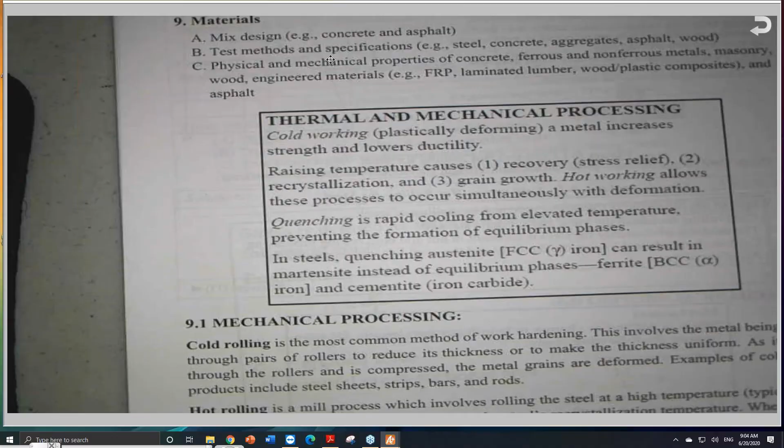Good morning, everybody, this is Dr. Mansour, and today is June 20th, 2020, the AM Civil Breadth AM workshop. We still have one more to go, the one I added to make up for the class I missed, which will be July 4th. So today I have the Civil AM from 9 to 12, and surveying today from 1 to 4. This was also an additional surveying class for those taking the California special exam.

After I finish the course, I added 2 sessions. Tomorrow I have transportation PM from 9 to 12 and seismic from 1 to 5. So this is this weekend. The following weekend, the 27th and 28th, I have transportation construction on Saturday, and Sunday I have construction again, and seismic. Finally, the last free session is going to be July 4th.

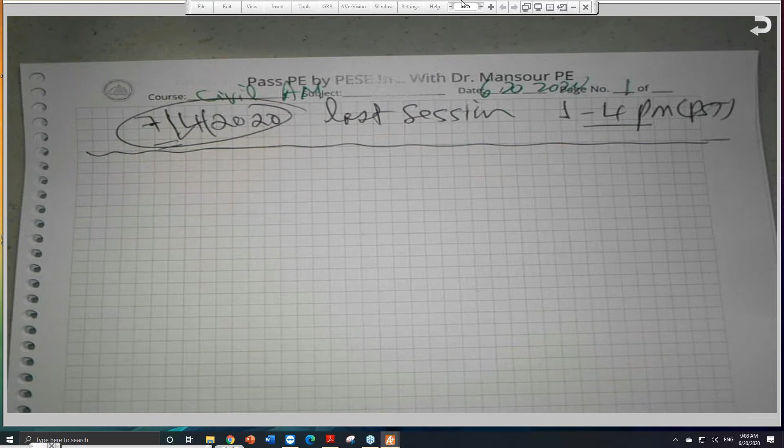I'm extremely busy, but this will not stop me from giving you the solutions for mini exams 1 through 5. There is another chapter, and I don't know if I sent it or if I should ask one of my assistants to send it to you. If not, I can send it during the break. This chapter, by the way, I wrote about a year ago, maybe more or less.

And the chapter has a title of Materials, like Chapter 7 of the Civil Breadth Reference Manual, my textbook for the Civil Breadth Reference Manual AM. Chapter 7 is called Materials, which, according to NCEES, theoretically speaking, you're supposed to get 6 questions related to materials. A parallel chapter, going in almost the same direction, is for the FE, the Fundamentals of Engineering exam, or what used to be called EIT before.

I prepared this chapter and found it really, really useful. I even gave it to the PE group also. So I can say this is FE/PE, because the FE Civil exam covers almost the same material as the PE, even more, by the way. The FE Civil is testing, or covering, more topics than the PE, by the way. If you compare it, you will find this statement is correct.

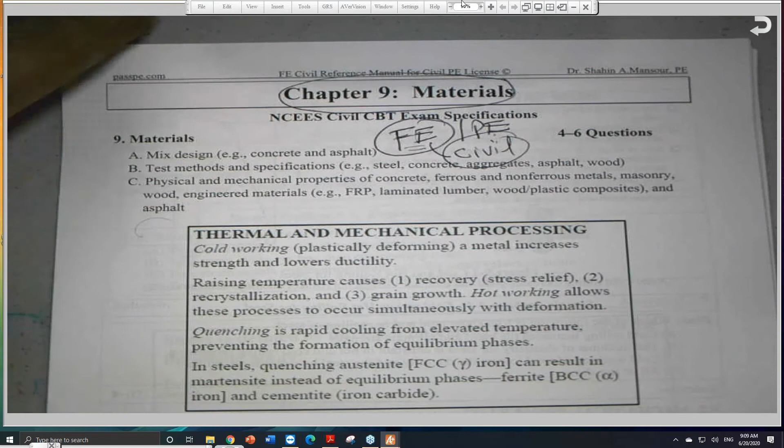So there is some kind of overlap, but I believe the FE has more additional material. When I prepared this chapter, I discussed it with the FE group who attended the class before, and hopefully this book will be out - I don't know when, but I started 2 years ago and I'm still working, I did not finish it yet. They are even going to change the FE on July 1st, 2020, changing the arrangement of topics. Instead of 18 chapters in the old one, right now there are 14 chapters. Anyhow, I will send this chapter to you.

I received one question from one of you, but I don't understand it, even though it's typed from another source. It's asking about the maximum tension for an RCC beam. I will bring the print of this question next time. I know that RCC by itself is roller compacted concrete, another type of concrete used for dams, but the question isn't clear to me, so I haven't responded back to the engineer who sent it, but I will. I don't ignore any questions - if you send one to me, I'll do my best to come back to you as soon as I can. He got this question from somewhere about maximum tension, and it's really not clear to me, so I will look at it and come back to you.

So when we look at materials, which we talked about last time, we need to make sure we understand the properties of these materials. For the PE exam, they expect you to know properties of concrete, steel, asphalt, and wood, and probably I will add masonry to it. We can talk a little bit about masonry - CMUs or bricks, masonry in general, concrete masonry units and bricks.

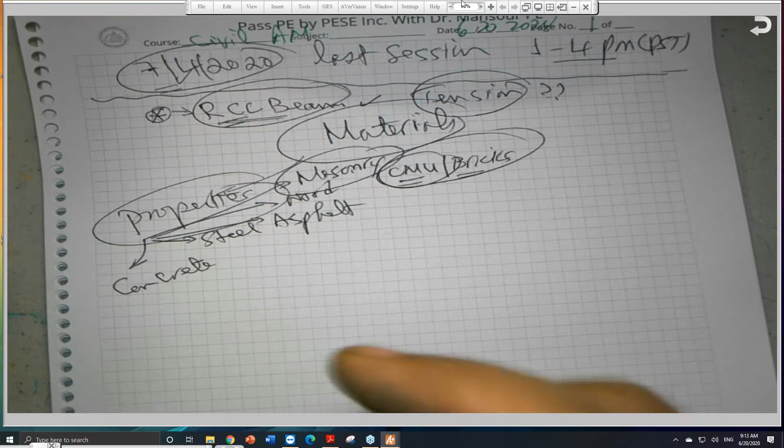I taught a class here at CSU Fresno on masonry design. We have a very nice textbook available in the market, and some of you use it. I also taught wood for about 20 years. Asphalt, steel, concrete - all these things, they expect you to know. The equations and the properties are very important. Some of these materials have equations related to their properties.

For example, for concrete, we should know that F sub C prime equals P over A, which is the uniaxial stress for the cylinder, the famous cylinder, the 6/12 or 4/8. We should know that this is the 28-day compressive strength - F sub C prime is supposed to be at 28 days. This is the 28-day compressive strength we use for designing beams and columns and so on.

Under concrete, you're also supposed to know the modulus of rupture, F, sometimes called sigma, F sub R. Let me double check because I need to stick with the ACI abbreviations. Based on the ACI, American Concrete Institute, I always stick with the abbreviations as much as I can, so F sub R is correct - that's the modulus of rupture. The modulus of rupture is calculated using MC over I, the bending stress or flexure stress formula, but they call it MOR or modulus of rupture.

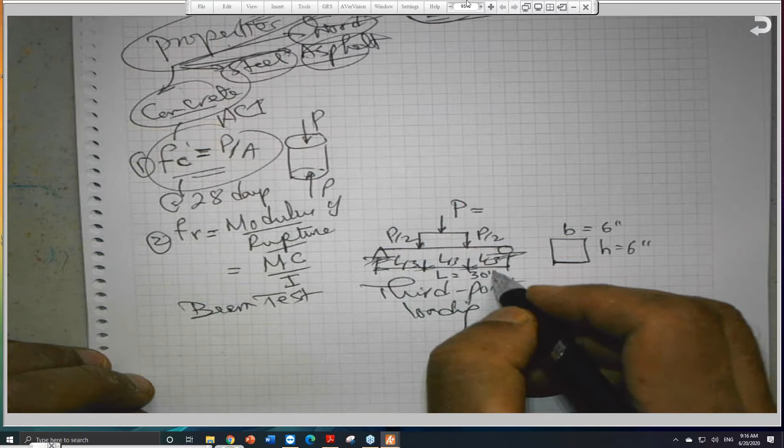Sometimes, okay, but let's assume for the sake of discussion that this beam is 30 inches and it's 6 by 6, and let's assume that the load here is, to get something a little bit reasonable, about 4,800 pounds, or make it 5,000 pounds. This is the failure load, or maximum load.

Based on that, can you tell me what is the MOR? The MOR, or the modulus of rupture, and the 30-inch is the span length, and the load is loaded at the 1/3 point loading. Can you tell me what is the MOR? Let me give you 1 minute only. You calculate it for me.

This is 6 inches by 6 inches. This is concrete, unreinforced beam. Normally it is unreinforced, is a plain concrete. And if the maximum load recorded from the testing is 5,000 pounds, and the cross section, can you calculate what is the MOR, the modulus of rupture, or F sub R, which we take as an indirect test for tension properties of concrete, or for tensile properties of concrete.

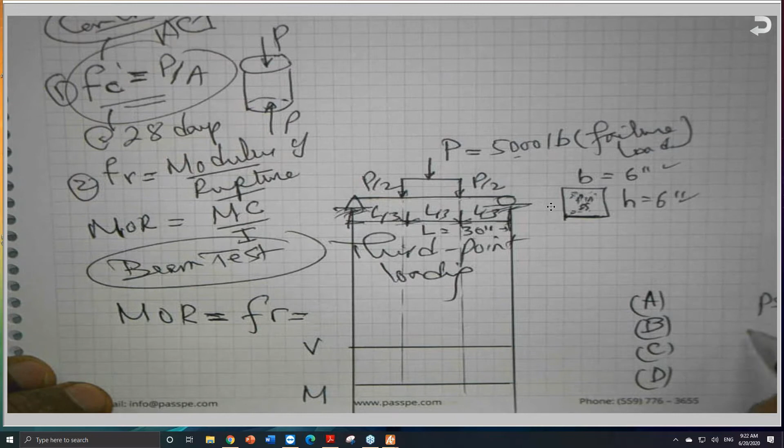I got a number from one of you. Give me a number, no, I need a number. You are giving me an equation. The equation you are giving me, my friend, is the ACI equation. This is an empirical formula, but I need a number. I need how many PSI. I will talk about this, Muhammad. This is actual testing, this is what you see here is actual. I need a number. I got a number. Maybe it's okay, give me a number.

Pound inch units are very important. I have PSI and pound inch. The correct units are PSI. So I got 694 from two of you, and I got some different answers.

So the modulus of rupture, MOR, it came from the beam test. And we use the modulus of rupture as an indirect measure for tensile properties of concrete. Concrete is very weak in tension, as all of you know, and strong in compression. But we need to determine the tensile strength of concrete. So there are two tests. It's called indirect because there is no direct test.

And I will explain this one more time, but let's take one step at a time. So the MOR, modulus of rupture, or F sub R as ACI uses it, it came from this MC over I. So what is the moment?

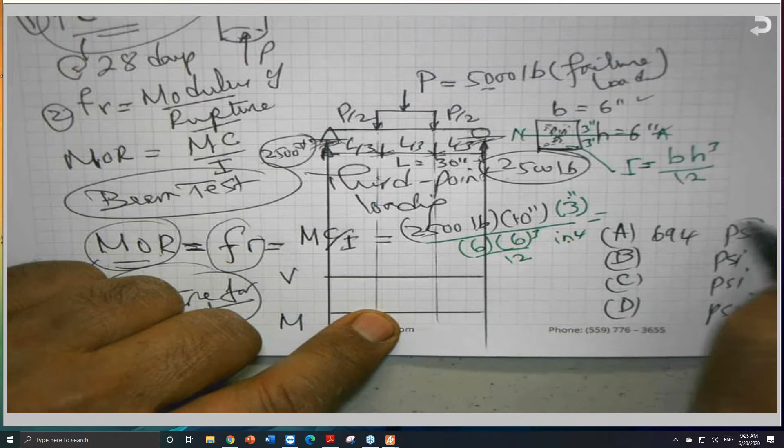This is the modulus of rupture. It is a small number, as you can see, 694, okay?

Because the concrete that will produce this amount of modulus of rupture, this F sub C prime, if you prepared a mix from the same material used for this beam, and you prepare cylinders and test it according to ASTM - by the way this is ASTM C39, each test has a number, as you know. The American Society for Testing and Materials assigns a number, C for cementitious materials, and 39 is the number. The beam test here is ASTM C78.

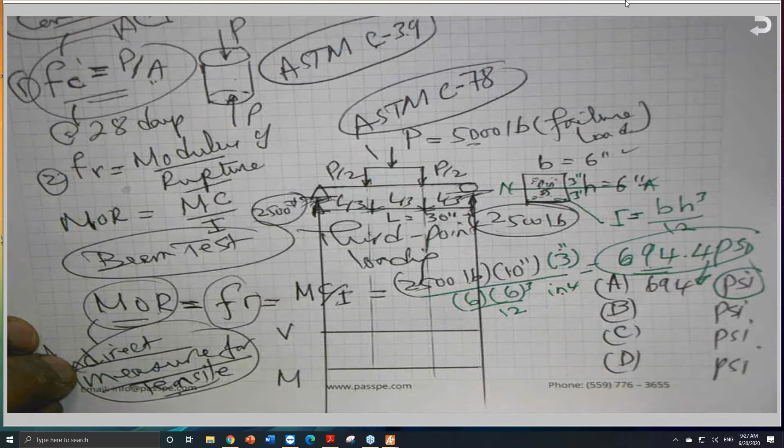And I will double check these numbers. I remember that these numbers are correct, but so - if you have the ASTM, the American Society for Testing and Materials, there are 64 books, and these books explain how to do the testing according to the standards.

So if you do ASTM C39, which is a compression test, to determine the compressive strength of concrete, which is F sub C prime, if you prepare the cylinder or cylinders using the same mix, you may get a number in the neighborhood, at least, maybe 5,000 to 6,000 psi, at least psi.

Remember, this is 500 pounds. This is the failure load. This is a stress. So 5,000 or 6,000 psi at least. Okay. Because...

Let me move to the second page here and try to explain this. Because F sub C prime, as I told you, it will be - I don't know, it's not given to me - but at least between 5,000 to 6,000 psi. Because the ACI, the American Concrete Institute, the blue book or the blue code, they came up with the empirical formula, the one that Muhammad is referring to, that we can determine the F sub R using the empirical formula that's given.

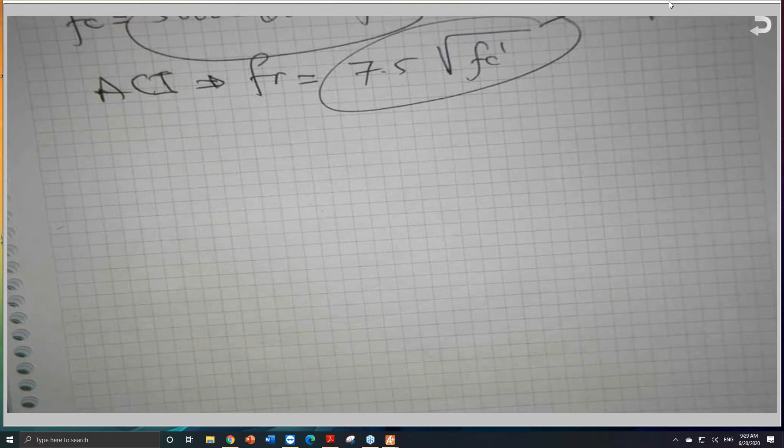If you don't have the setup, or you don't have time, let's assume you have the capability to set up but you don't, and you need to estimate the F sub R very quickly, so we can use the empirical formula. Let's assume 5,500 PSI is my number here. So it is 7.5 times the square root of 5,500, since this is an empirical formula, units don't work because you put PSI under the radical. If you do this, assuming 5,500 is the number given to you, take the square root and multiply by 7.5, you get about 556 PSI.

Okay, it is a number. If we know the exact number here, if you put 6,000, maybe you are getting close to the 694 psi. But so we use this as an empirical - this must be given to you, you cannot just assume it. But here I just guessed, okay, maybe between 5,000 to 6,000 psi.

The reason I guessed, and probably my guess is not exactly right, is that the F sub R, the modulus of rupture, is about - again it is a range - 10% to 15% of the F sub C prime. So if we take 6,000 and say 10%, probably 600 psi. If you take somewhere around 15%, maybe this one. So this is the range of the modulus of rupture as a function of F sub C prime, about 10 or 15% of its compressive strength. So the tensile strength of concrete is this measure, tensile strength, and this is the compressive strength.

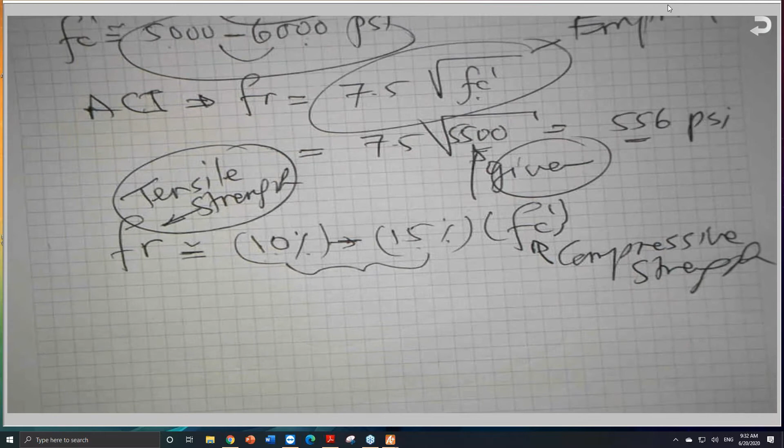It's about between 10 to 12%, 10 to 15% at the most. This is okay, a very low to a very high, even a highest value. So this is a very wide range, and normally some people will just say I'll take it as 10% or 12%, and that's fine, nobody will blame you, but the actual testing will differ. We use this empirical formula in order to estimate.

So in design, the ACI code, we ignore the 10 to 15%. We are saying that the concrete will carry zero tension stress or tensile strength. Concrete will carry zero tension. So in design, the ACI code says that concrete will carry zero tensile strength, or it doesn't carry any.

And you remember this from the stress block I mentioned before: if you have a rectangular beam with reinforcement, as shown here, the tensile rebars - we have the Whitney stress block, and the tension is T, at the centroid of the rebars. There's a block called the Whitney stress block, and C, the compression, equals 0.85 F sub C prime times A times B, where B is the width, D is the effective depth, and H is the entire depth. But D is to the centroid of the rebars. So C is 0.85...

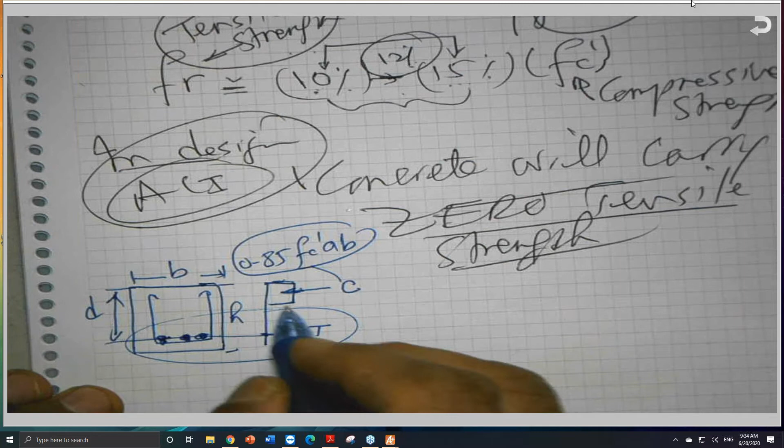Below this, all this concrete will carry zero tension. This is a compression block, so from here to here there is nothing - we assume it's vacuum, there's nothing there, and we draw the neutral axis and so on.

So why do we need to do this? Why do we do the beam test? Either we can do the actual beam test, prepare beams and test it, and get M sub MOR - this is one test. There's another test called splitting tensile strength, which I'll mention after I finish this. Why are we interested to know the value of F sub R, either from the empirical formula or from the actual test?

Because when we design slabs, especially for highways and streets, concrete slabs, PCC pavement, these slabs under the effect of loads coming from trucks - the ESALs, the equivalent single axle load - as you know, the tire loads from the truck, what will happen to these slabs? We expect them to concave like this. So this is the tire load, either this one or this one. So this is compression and this is tension.

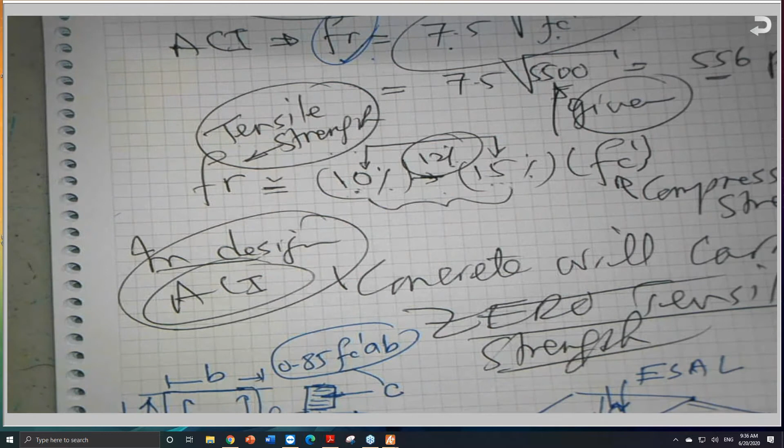So the bottom of the concrete slab is going to be under tension. We need to know at what level the cracks will start to generate along the tensile side. This is why for pavement we specify F sub R. Even though we know concrete isn't supposed to carry any tensile stress, I need to know at what level the concrete starts to have cracks along the tension side, in order to design a very good structural section so this concrete resists the loads with minimum cracks - because cracks let water in and create problems for the pavement, as we've noticed.

This is why nowadays we use what's known as CRCP - continuous reinforced concrete pavement. CRCP is very common right now, though expensive. We put rebars in both directions, and sometimes dowels too. In CRCP, some of you have probably already worked on projects with it, where we put rebars to ensure the concrete will last, because concrete is very weak in tension. The rebars extend the life, especially along the tension side, because concrete is very strong in compression - so the rebars help resist the tensile stresses.

So I needed to know that. Before I leave this drawing...

I'll draw something here, two lines, we call them datums. Can you draw the shear and moment diagrams for this setup, for a beam loaded with these loads? Let's assume this is 5,000 pounds. Can you sketch the shear moment diagram very quickly? Let me give you another two minutes, because we need to know that.

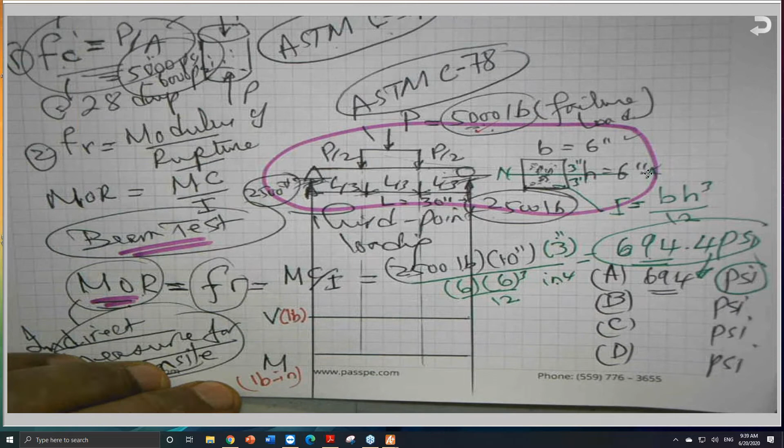So the shear diagram is going to be like this. I have 2,500, I will go up 2,500, and I will go straight, and I will tell you why we go straight. I will hit P over 2, which is another 2,500, will bring me down, and I will move horizontally zero in the middle third. After that, I will go down 2,500 again until I hit the other reaction, and close the diagram.

So the shear diagram here is positive, and the shear is negative, and this value here is 2,500 pounds. I put the units, pounds, here based on 5,000. This is given to you, by the way.

Failure load must be given. Don't assume it. It must be given.

So this is 2,500 also. So this is the shear diagram, and the shear in the middle is zero. No shear in the middle.

Why is this straight? Because there is no load between here and here. And we have two important relationships, which I'm sure you remember: dV/dx equals negative W, and the second equation, dM/dx equals V. These two equations, if we remember them, we should be able to draw any shear moment diagram that exists on Earth.

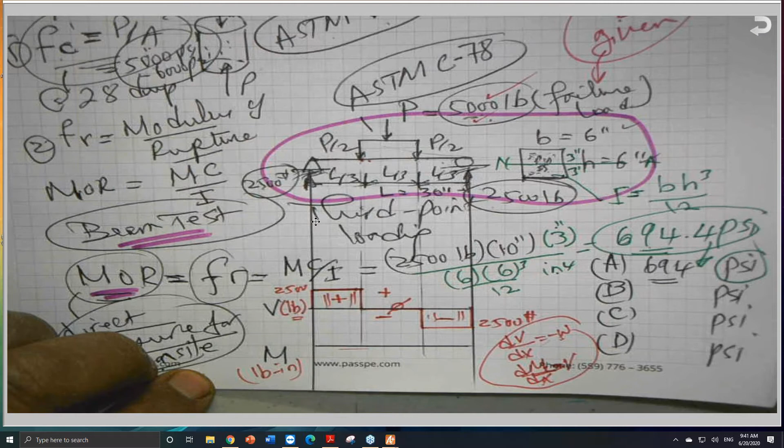So the bending moment diagram is going to be positive from the beginning to the end, from point A to point B. And if this is point C and this is point D, the bending moment diagram is going to be like this.

Try to squeeze it in here. This is horizontal, has a zero slope because there is no shear, and it is linear from the supports to the maximum. So this is a positive bending moment, okay?

And the maximum value here, which is M max, is 2500 times 10. So it is 2500, and another zero, is 25,000 pound-inch. And the moment here is zero, and the moment here is zero, and this has a zero slope.

Because dM/dx is equal to V. The slope of the bending moment diagram must equal the shear. The slope of this line is positive, and that's why the shear is positive. The slope of this line is zero because the shear is zero. The slope of this line is negative because the shear is negative.

So these two relationships, let me write them on the following page also, just in case you're not able to read my Egyptian handwriting: dV/dx equals negative W, the load, and dM/dx equals V. These two relationships are very, very important to draw the shear moment diagram for any given beam.

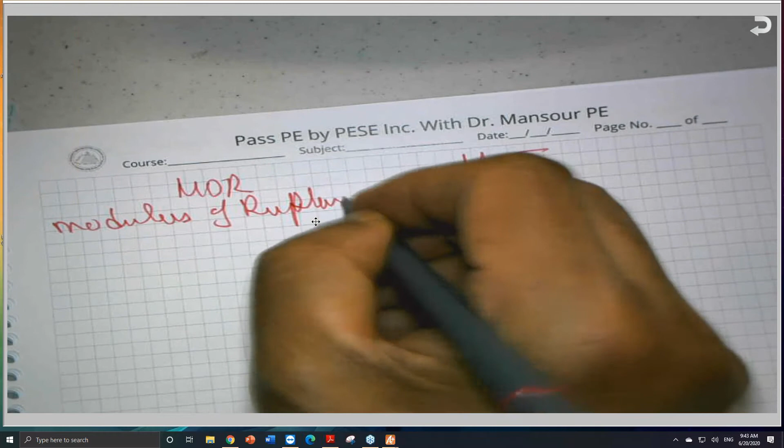Okay, so let us go to the question: what is the difference between modulus of rupture and modulus of elasticity? So the MOR and MOE - this is the modulus of rupture, modulus of rupture, and this is the modulus of elasticity.

Let me put it in a table form. Engineers, they enjoy tables, okay? And diagrams and figures and illustrations.

As far as units, this is PSI, Pascal, or megapascal. I have no problem with that. This also in PSI, Pascal, or megapascal, so units are essentially the same. PSI, sometimes we use KSI, but very rare. Okay, also here will be KSI, kips per square inch.

The modulus of rupture determined in the lab, or the field, by the way. Sometimes we do field testing for the beams. Determined in the field or the lab from the beam test. This is determined in the field, if there is a mobile lab, or the lab, from the cylinder test.

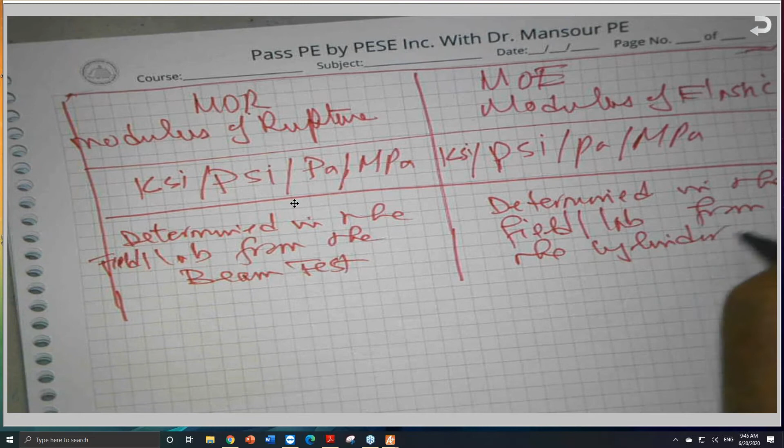There is one test called the cube test, but we don't use it in the United States. Canada uses cubes, but in the United States we don't use cubes. So the cylinder...

So the equation F sub C prime is equal to P over A. This is why you will find that in the NCEES book, and some of you already saw this problem 10,000 times. Let me make it 10,001, and forgive me for that. If you saw it 10,000 times, make it 10,001, please.

Okay, and I will give you 22 seconds to do it for me. I think it used to be here. I don't know, unless they took it out. No, here it is, still there. Here it is, problem 134. Let me give you 22 seconds to do it.

Problem 134, this is a blue book, by the way. The transportation, construction, geotechnical, or water resources, whatever book you have, all 40 problems of the AM are essentially the same, notice. So, problem 134, please. If you don't have the book, here it is.

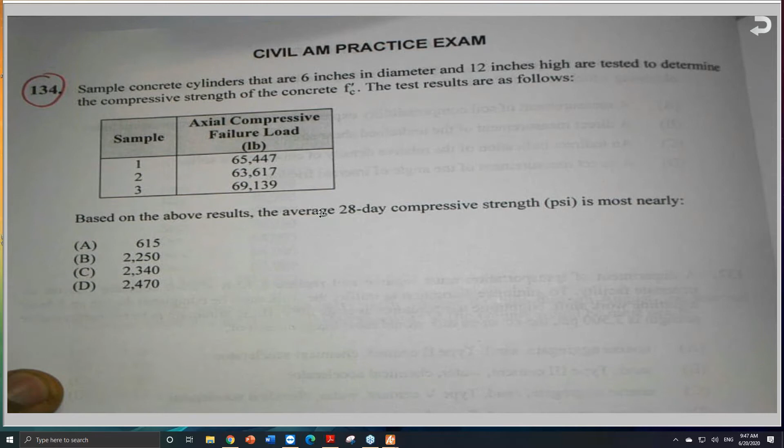Okay, so sample concrete cylinders that are 6 by 12 -- 4 by 8 also we are using, by the way, 4 inches by 8 inches also. You might see them on the exam. As long as the ratio H over D must be 2. This is 12 over 6 is 2, and 8 over 4 is 2, and there is a reason behind that. So H over D ratio, H over D must be 2.

Something from the theory of elasticity. If you go to grad school and do your master's or PhD, you'll cover theory of elasticity, and we discuss why the H over D must be 2. The height to diameter ratio must be 2. So this is H, and this is D. In our case, this is 12 inches and this is 6 inches. So H over D, okay.

And he gave you the axial compressive failure load. We carried the test all the way up to failure, and he gave you 3 values. And he's asking what is the F sub C prime, which is the 28-day compressive strength.

And you probably heard the joke before, why they made it 28 days, why? So nobody will come to work on the weekend. Because if you prepare the cylinders from Monday to Friday, the 28 day will also be Monday to Friday. Unless you prepare the cylinders on the weekend, you have to come on the weekend. But this is a joke. The real reason for 28 days has nothing to do with the weekend -- it's the date they agreed upon to make sure the concrete gains strength such that when we apply the load, we achieve 100% of F sub C prime. They did testing and they came up with this date, okay?

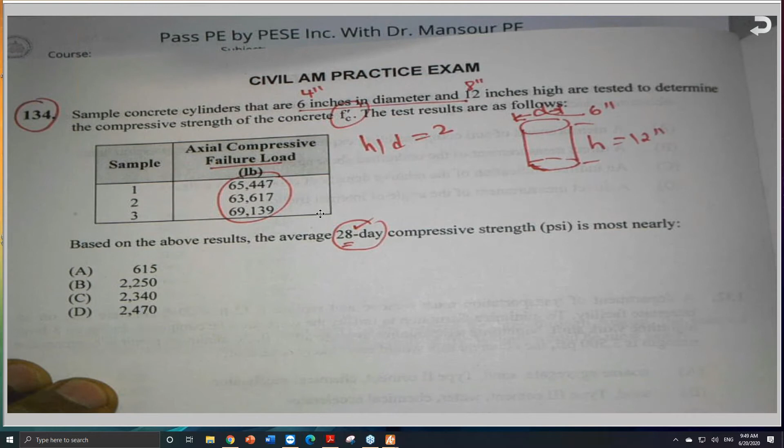So the F sub C prime, which is P over A. A problem like that, you don't need to open a book, you don't need to open any reference, because this is already stored in your brain and you are able to solve it. So the load, we have 3 loads: 65,447 plus 63,617 plus 69,139, and I will divide by 3 because I will take the average. So the average load over the area. Area is pi D squared over 4, or pi R squared. So it is pi times the diameter, 6 inches, squared over 4.

And you'll get a number and you will select the answer from here, whatever the number is. The H has nothing to do with the calculations because this is axial load. Axial -- the word axial, you are using axial, because the load is coming this way. The load is applied to the cylinder perpendicular, because for this axial load P, the area must be perpendicular to P. This is the load, P.

And where is the cross-sectional area? Here it is, the area of the cylinder. So the load is perpendicular, or the area is perpendicular to P. So whatever the number is, it must match one of these numbers here, which is the average. This is why the word average is very important: average 28-day compressive strength in PSI. And if you go to ASTM C39, they will tell you how to perform this test. It's very important to know how to perform the test.

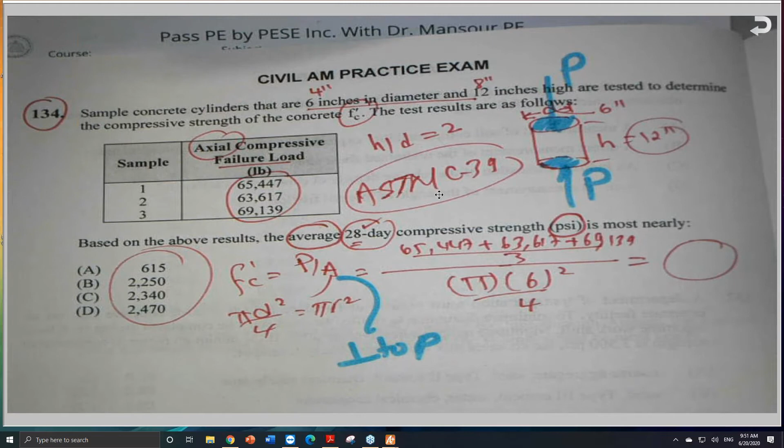So this is called F sub C prime. I will go back again to this page to ask you a question. So this is P over A. This one here, the modulus of rupture, is determined as F sub R or MOR, if you like to call it. This is the F sub C prime. MOR is equal to MC over I. So I determine this, F sub C prime, to get the modulus and the 28-day compressive strength.

But I'm talking about the modulus of elasticity. How can we determine the modulus of elasticity from the compression test? We do this. I have the cylinder, and we do what is known as a compressometer. It is a steel cage. We put it around the cylinder and screw it. It's called a compressometer.

Or compressometer. It has a dial gauge, and as I apply the load, I collect the load P versus delta. Delta is obtained from this gauge. There is a dial gauge we call delta, deformation over this gauge length. By the way, this is L, the compressometer gauge length, 12 inches. Normally this compressometer has a gauge length of 8 inches. Some of them are 6. 2 inches at the top and 2 inches at the bottom.

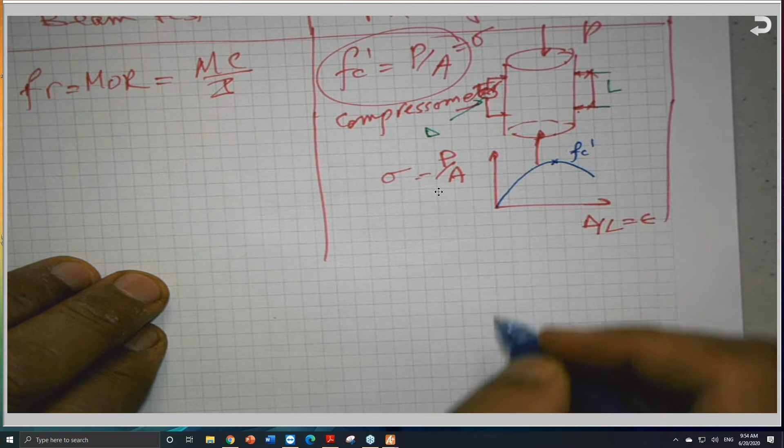So P and delta. If I divide delta by L, I get strain. P over A gives me stress. So basically I'm plotting stress versus strain. In fact, F sub C prime is a stress, by the way. And I will plot this curve. It will come like this. This is what we call F sub C prime. And this number is about 0.002 inch per inch. So the maximum here is F sub C prime.

The modulus of elasticity, we determine it from the cylinder test. After we do the cylinder test and collect the load versus deformation, delta is called deformation.

Modulus of elasticity has 3 definitions. We call it E sub C. We have initial, tangent, and secant modulus of elasticity. There are 3 of them: initial, tangent, and secant modulus of elasticity. In my book, chapter 7, there is a diagram showing that.

But we are going to stick with the modulus of elasticity as adopted by the ACI. They say that if I come here at F sub C prime divided by 2, half of F sub C prime, and draw a tangent to the curve, because this is a curve - it has a little bit linear here, but it's a curve - the slope of the line tangent at F sub C prime, we take as the tangent modulus of elasticity. The tangent and secant are very close, because the secant connects this point with the origin. So anyhow, we determine this from the stress.

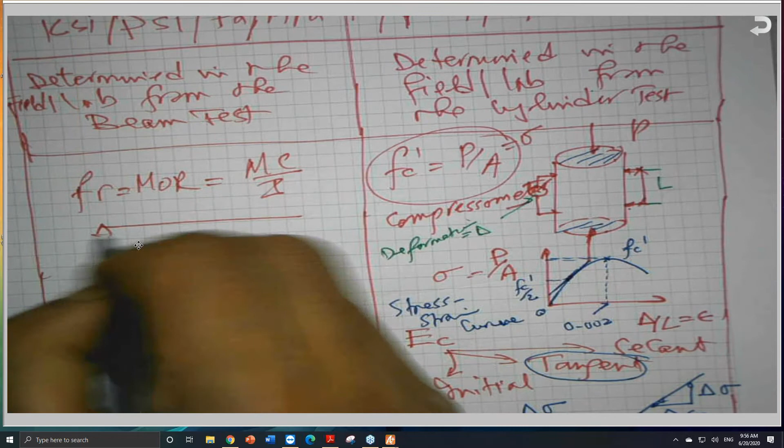Here, we determine this from the beam test, as in the problem we solve together. It is like this, and we use third point loading, not center point loading, for a reason. We used to have a load in the middle, but they got rid of that test. This is in PSI or KSI. The F sub R here, as I told you, is about 400 maybe to a maximum of 700 PSI.

But if you look at the modulus of elasticity, E sub C is between 2 to 7 million PSI. So the difference is huge - this is in millions, this is in hundreds, 400. So modulus of elasticity is between 2 million to 7 million PSI. It depends on F sub C prime. They have an empirical formula here, the one I mentioned: F sub R is equal to 7.5 times square root of F sub C prime. This is an empirical equation or formula.

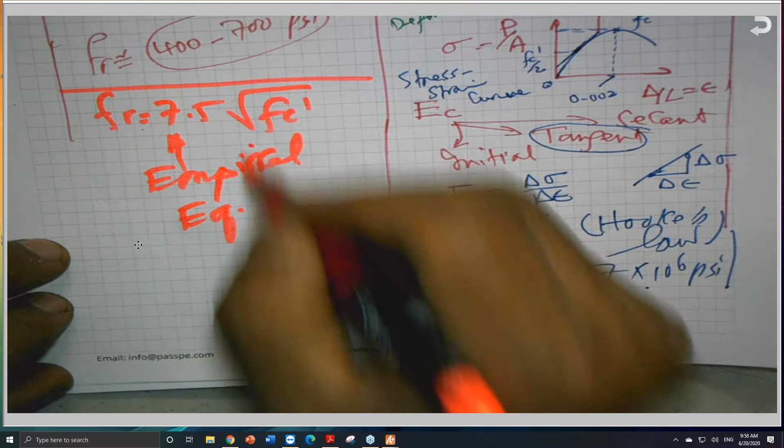Empirical formula. This is also by the ACI. The modulus of elasticity also, it does have an empirical formula.

It does have an empirical formula, which is given by this equation: E sub C is equal to 33 W to the 1.5 times square root of F sub C prime. Or for normal weight concrete, we use 57,000 times square root of F sub C prime.

Also, this is an empirical formula, empirical equation. After a lot of testing, they came up with this. So this is 2 to 7 million psi. This is just only 400 to 700 psi.

As we mentioned, the units: this came from the cylinder test, and this came from the beam test.

We use this, F sub R, for what? What are we using this for? We're using it for pavement design, mainly because of the cracks that will be developed in slabs on the freeways.

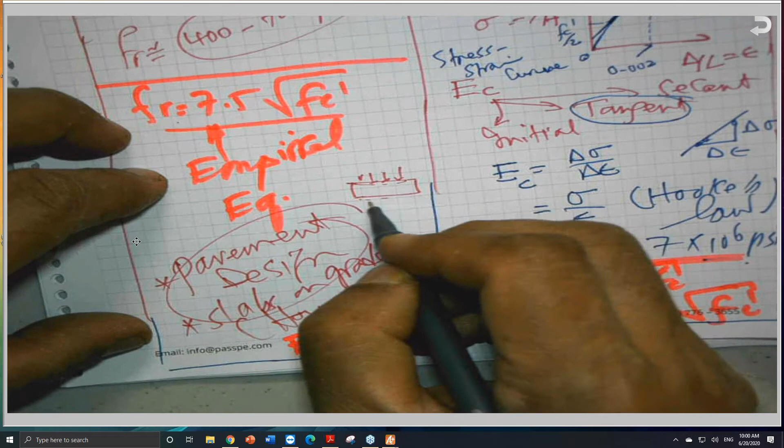Or sometimes slabs on grade for houses. This is another application, like houses. If your house is on a slab, we specify the compressive strength and we also specify F sub R, because I don't want the slab of your house to start to crack. After we start using the slab, it will probably concave a little bit down, so we don't need cracks to start developing.

Also, at the same time, the E sub C - what do we use E sub C for? Why do we determine this? Why do we determine the modulus of elasticity for concrete? What is the benefit of that?

We know the benefit of F sub R, so we can determine the cracks that will be developed. The modulus of elasticity, you will find in the deflection equation, and all of you are familiar with deflection equations or deflection calculations.

You might be given a problem, and I believe I have one, if I remember correctly, and I asked you to solve it. I don't know if you did solve it or not. So the E sub C, normally we denote with a C, is the modulus of elasticity for concrete, which is, as I said, about between 2 to 7 million psi.

It's a range, because it's a function of F sub C prime. The higher the F sub C prime, the higher the modulus of elasticity. So what do we use the modulus of elasticity for, for concrete? Why do we need to determine this, either in the lab or using the empirical formula, as I mentioned?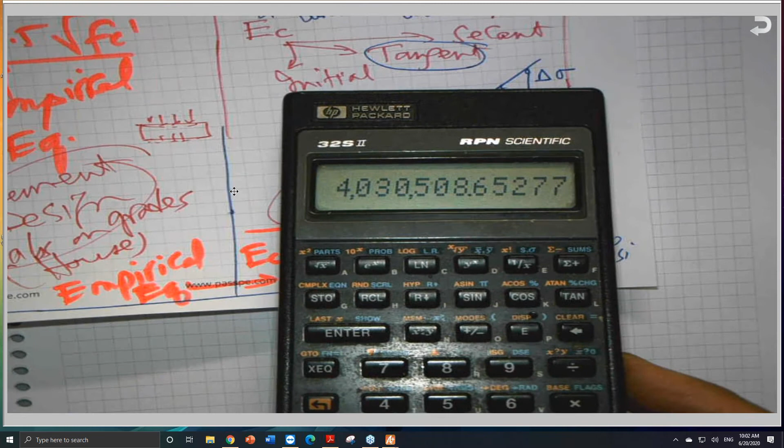If you don't have the capability of doing such testing, but you know what F sub C prime is, you plug it in here. For example, if F sub C prime is 5,000 psi, for the sake of discussion, what do you expect for the modulus of elasticity? Take 5,000, take the square root, and multiply this by 57,000. It comes out to about 4.03 million psi.

So I needed to be aware of that. So the use of the modulus of elasticity - we use it for deflection calculations, because the deflection, as given in the steel manual or any other books, including mine, deflection calculations.

Very, very important. Let's assume, by the way, I have a diving board in your house, a swimming pool, you have a diving board, and let's assume it's fixed, just for simplicity. This diving board is fixed at one end and free at the other end, and here is Mr. Mansour, or Dr. Mansour. Let's assume 200 pounds at the free end of the diving board, and here is a swimming pool - he's going to jump into the swimming pool.

If this diving board is made of steel... and another scenario: Mr. Mansour says steel is very expensive and it might hurt, so you use aluminum instead. And the same gentleman, Mr. Mansour, 200 pounds - assuming that I am way less than 200 pounds, by the way, but assuming that, to make it easy for you. So if this L here is 14 feet, and this L here is also 14 feet.

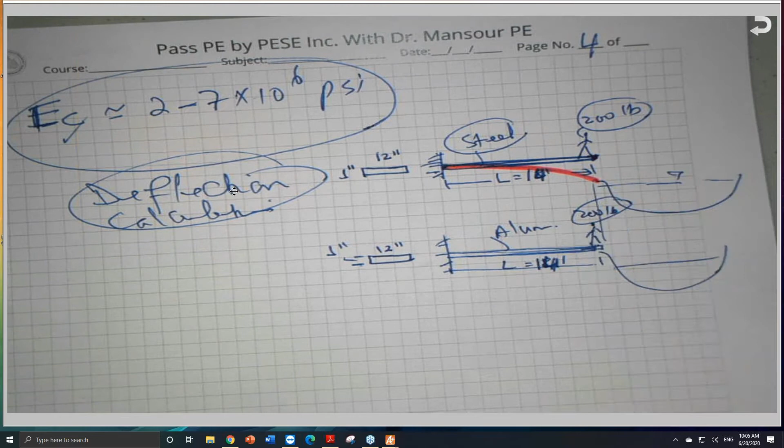And the same weight at the tip of this, assume this is a concentrated load. I will be putting my foot into the tip of this. So we are expecting that when I step at the tip of this diving board, it will come down. And the same story, it will come down. So this is delta 1 or delta steel, and this is delta 2 or delta aluminum.

I will go back again why I'm mentioning this in relation to concrete. I didn't make the diving board of concrete, but if we understand this, it will be applicable to concrete and to any other material.

Do you expect that delta 1 equals delta 2? Or answer B, delta 1 greater than delta 2? Answer C, delta 1 less than delta 2? And answer D, delta 1 is equal or about 1/3 of delta 2.

This is the first question I am going to ask. The second question I will ask, what are these values? A, B, C, and D.

So I need two numbers: one for the steel, how much is the absolute value, and one for the aluminum.

But before we take the first break, let's answer this question here, and let us vote. We are a democratic country, as I mentioned. Is delta 1 equal delta 2, or delta 1 greater, or delta 1 less, or delta 1 is about 1/3 delta 2?

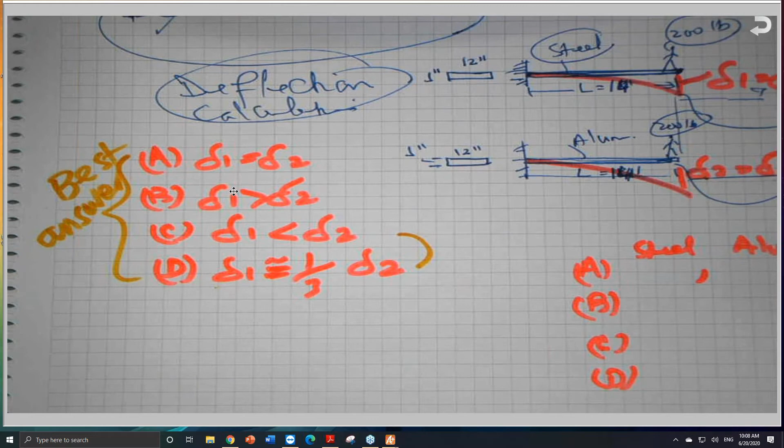If we know the delta equation, either delta uppercase or delta lowercase, whatever is convenient for you -- some books use even V, like NCEES, they were using V in the past. I don't know if it's still using this delta. Let me just erase this here to make it just delta without specifying. So some books use delta uppercase, some books even use V, which is a deflection.

The deflection is a function of, or depends on, some parameters. If I know these parameters, I should be able to answer this question correctly.

So already I gave you 50-50 because I eliminated an answer. Delta 1 is in fact less than delta 2. Delta 1 cannot be equal to delta 2. This is wrong, and this is wrong. So delta 1 is less.

But I added another answer here: I said delta 1 is about 1/3, and this is the best answer. So if this question is given to me, I will select this. Delta 2 is the aluminum one, when the diving board is made of aluminum.

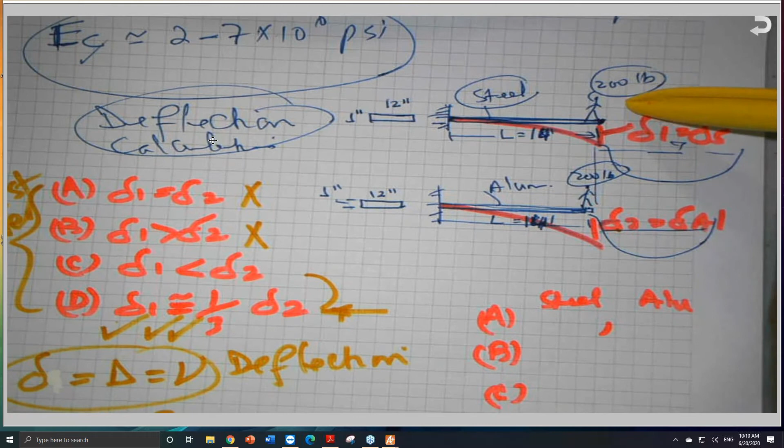Why? Because delta, for a situation like this, for a cantilever beam that has one concentrated load at the free end, as shown, is PL cubed divided by 3EI. This is the equation that you see in steel books or steel manuals, and in my books.

I will show it to you, or in other books available in the market. You will find that the load P is my weight, and I assume my weight is a concentrated load.

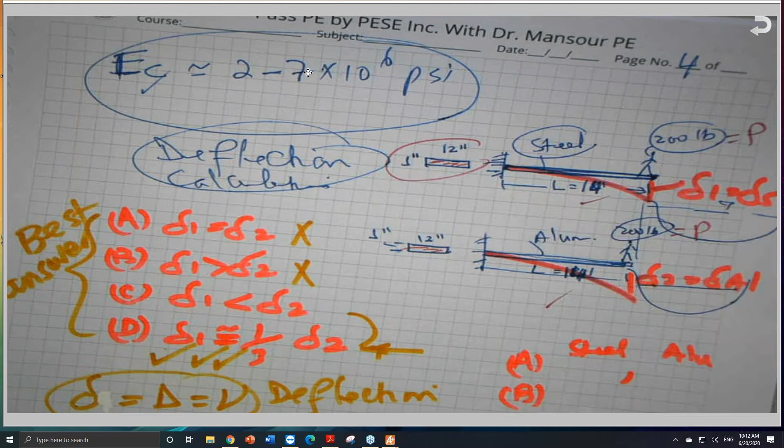So this question here, if I know E steel and if I know E aluminum, I can say the ratio between them is the ratio of the deflection, because all the other parameters -- P, L, and the cross section, which gives me the moment of inertia or second moment of area -- are the same. So E steel is a constant number, by the way, 29 million PSI.

They remember the E concrete between 2 to 7 million PSI. Steel is 29 million PSI.

E aluminum is really not constant. It varies between 8 million PSI, or 8.6 in fact, to 11.3 or 11.2. So normally we say E aluminum is about 10 million PSI.

It's acceptable to use this number for the sake of calculations, unless he gives you the type of the aluminum alloy. I can go to the references and show you that to get the exact number.

But steel, it doesn't matter what steel is. A36 steel or A54 steel, name it, all kinds of steel, we still deal with one number. So we can say roughly that E aluminum is about 1/3 of E steel.

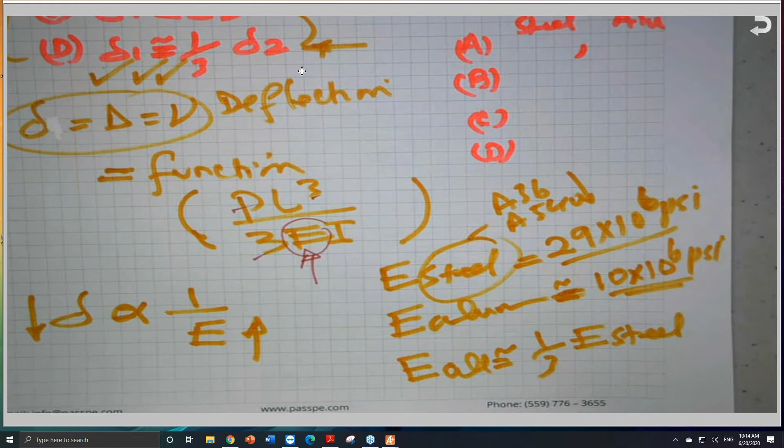This is why I use the 1/3, which is 10 million and 30 million. Even some books use 30 million instead of 29 million, still acceptable, but the steel manual uses 29 million.

So here, this is the best answer as far as I know: delta 1 less than delta 2. But here he's giving me some numerical values that are within the acceptable range. So answer D is the best answer, even answer C is still correct, but this is the best.

After the break, I'm expecting you to work out what will be delta steel and delta aluminum based on the given information: 200 pounds at the free end, 14 feet, 1 inch by 12, and the Modulus of Elasticity, 29 million PSI for steel and 10 million PSI for aluminum.

Let's get some numbers to see how many inches here and how many inches here, using this equation, PL cubed over 3EI, because I am expecting that we may mess up with units. Units are very, very important.

One is related to what is known as the modular ratio, the N, which we're going to see and talk about later on.

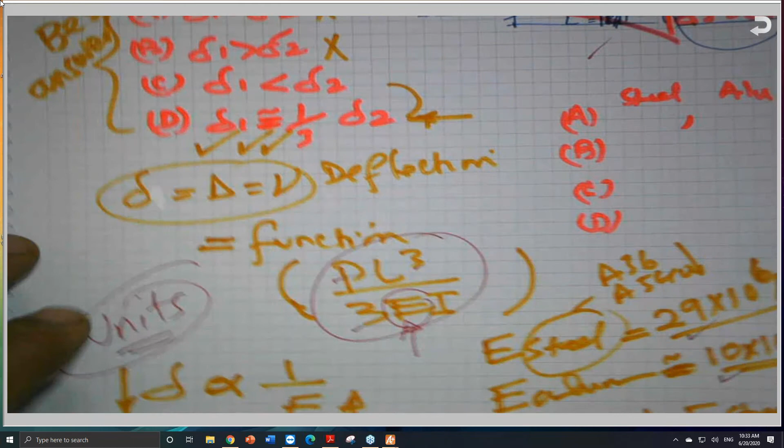Before the break, we were talking about this. Let me go to the question first, because some of you raised a question. And what's the question here? Let me go all the way down, I know there is a lot of... delta is equal to 1/3, okay.

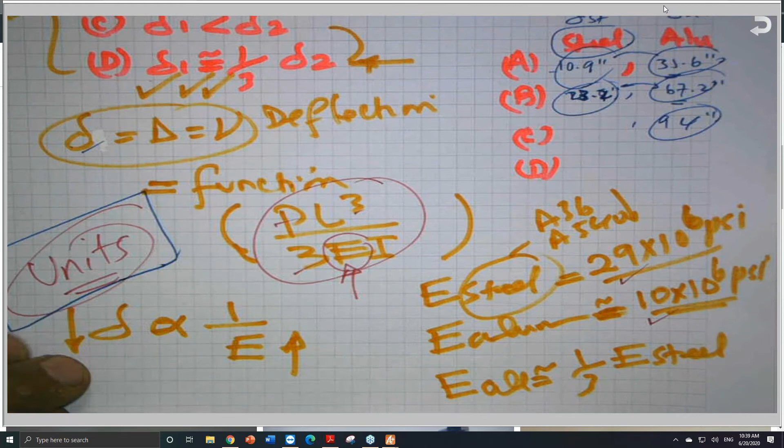Okay, so it seems to me that we do have a little bit of numbers here that are not consistent. So let us do it together very quick to see what's going on. And as I told you, units are very important - as far as taking care, everything is important, but we need to pay attention to units, because sometimes we make mistakes because of the units.

So we said that delta steel - start with delta steel, which is PL cubed divided by 3EI. So P is 200 pounds. L is 14 feet, I'll multiply this by 12 inches per foot, and this is cubed, divided by 3. E, I will use it as 29 million PSI.

And the I, since the cross section is given to be 12 inches by 1 inch, so it is BH cubed over 12. So it is 12, and this is 1 cubed divided by 12. So if we do this piece of calculation, unless I made a mistake here - if somebody can tell me what mistake I made, if I did any - PL cubed over 3EI.

So it is 14 times 12, times 200, and divided by 3, divided by 29 times 10 to the power 6, 12 will cancel. So I got 10.9 inches. This is delta steel - uppercase or lowercase, both are acceptable.

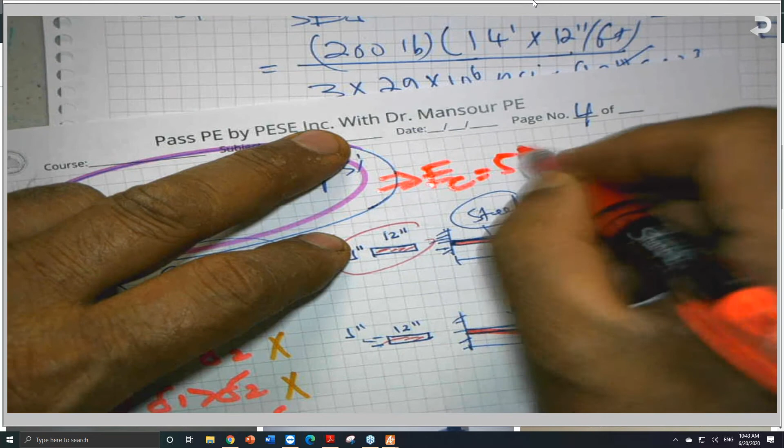So the modulus of elasticity for concrete, the number we said is between 2 to 7 million psi, is a function of f sub c prime. The empirical formula that ACI developed is E sub c equals 57,000 times the square root of f sub c prime. This is the empirical formula, and the modulus of elasticity will come in psi. It must be in psi. Don't worry about units under the radical; since this is an empirical formula, units are not really an important parameter.

This is something that when you receive it - if I remember correctly there was a problem, and I believe some of you already sent it to me, in one of the mini exams, maybe mini exam 1, 2, or 3. It's asking about the deflection, maybe 2 or 3. I don't have it with me right now, but basically it was a beam.

For those attending the first time, I'll go through it quickly. So delta - if I have a concrete beam that is part of a bridge design, let's assume L here equals 200 feet, and the cross section of the beam is 12 by 18 inches. Ignore the reinforcement - this is a concrete beam.

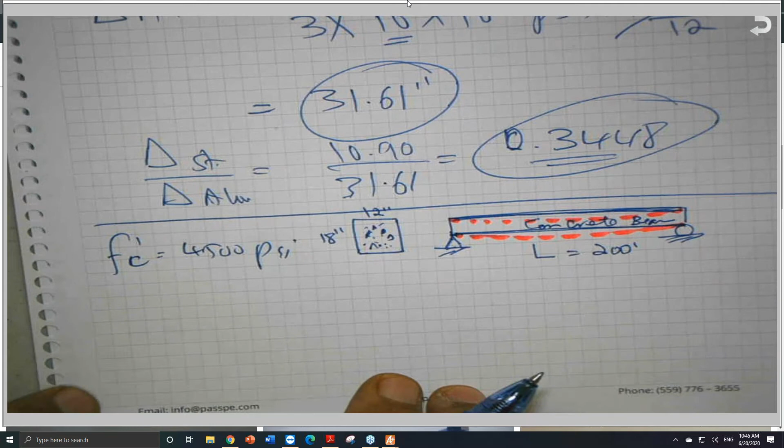This beam will deflect under its own weight as shown. Assuming that f sub c prime is 4,500 psi, find delta max under its own weight, under dead load, most nearly. Again I will ask you to give me 4 answers: A, B, C, D, and I need it to be in inches.

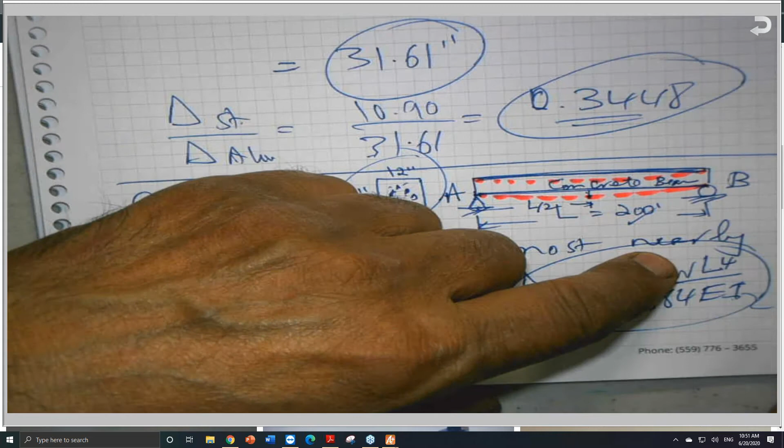Since I have the proper equation, and it's asking for the maximum deflection under its own weight, I need to get W, L, E, and I. L is easy, given as 200 feet. I is easy because I have 12 inches by 18 inches, so it is BH cubed over 12 - the famous formula for a rectangular section is BH cubed over 12, we should not forget that. For E, I know F sub c prime, so I will use the empirical formula.

E sub c equals 57,000 times the square root of F sub c prime. F sub c prime is given as 4,500 psi. So I take the square root of 4,500 and multiply by 57,000, which gives about 3.8 million psi, or 3.82 times 10 to the 6 psi. So I got E.

I is very easy. I equals BH cubed over 12, where B is 12 inches and H is 18, cubed, divided by 12. The 12 cancels out, so it is 5832 inches to the fourth. Correct me if I'm wrong.

So I got L, which is known, 200 feet. We still have W. W is the unit weight per linear foot.

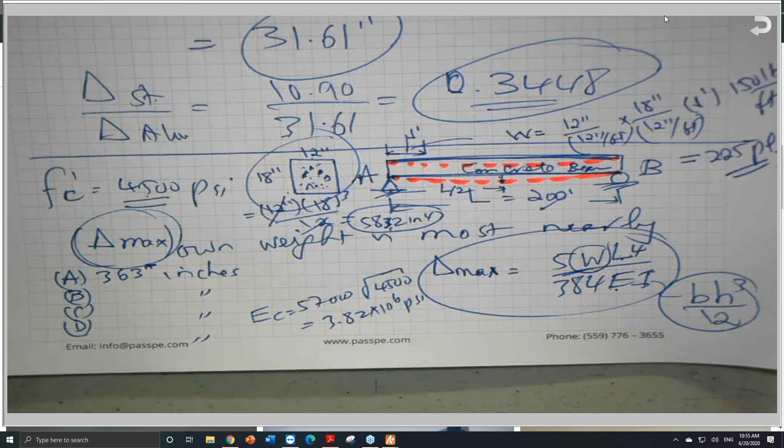Let me give you another minute. I gave you everything almost. So we need somebody to support this answer or give us another answer.

We got a completely different number, 21.8 inches. So we have another answer from another friend. Let's see who is going to be the winner.

The winner will take him to lunch. Don't worry, I will take you to lunch. But after this pandemic is over, just let me know, and don't worry, I will take you to lunch. Or you will take me to lunch, whoever is available.

Okay, here is another answer. That's good, I got 363 inches. And I got 2.52 inches. So 363, so 2.5, okay, 2.52 and 21.8. 21.8 and 2.52 inches, and 363 - there are another couple of answers that came to support this answer.

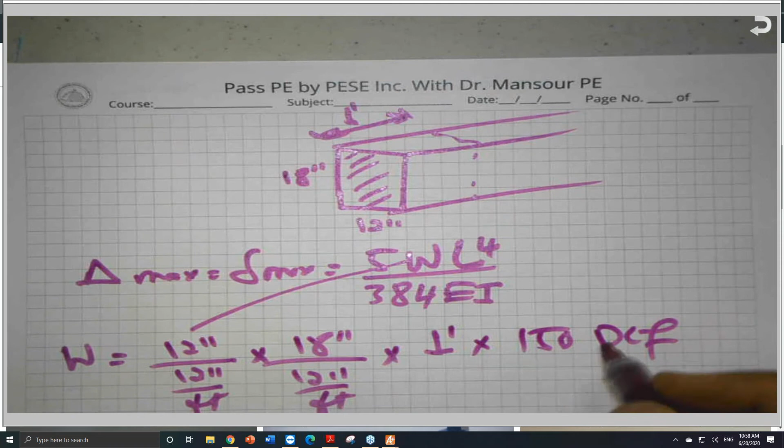I don't know if all of you use 150 or not. Maybe some of you use 145. Gamma concrete, as all of you know, normal weight concrete, is between 145 to 150 pounds per cubic foot. It's acceptable to write it that way. Make sense?

So this is the number that I got to be 225. Let me do it one more time. This will cancel, so it is 12, and it is 150 times, so it is 225, 225 PLF, pounds per linear foot. Every 1 linear foot of this beam is weighing 225 pounds.

So if I plug it into the equation right now, here we go. So it is 5, and this is 225 pound per foot. L, I gave it to you, 200 feet.

The equation is to the fourth power. If you go back to the differential equation and integrate twice and put the limits, you will find that the length is to the fourth power. Because if you remember, the cantilever beam was to the third power, PL cubed. So concentrated loads, we are dealing with L cubed. But distributed loads, do you remember? Because this is a distributed load, distributed loads go to the fourth power. I need you to remember that.

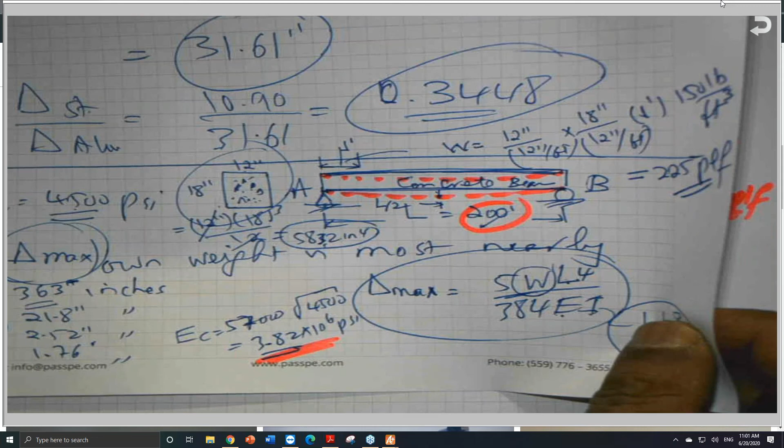Times, what is E? Do you remember E? 3.82 million PSI based on the empirical formula. So 3.82 times 10 to the 6. I is BH cubed over 12. Here it is, BH cubed over 12, which is 5832 inches to the fourth power.

This, by the way, is PSI. It's very important with the units. And finally, the I is 5832 inch to the fourth.

Let's look at the units right now, what we're supposed to get. So this is inch cubed. Cubic feet is done, and I have a pound, and this is pound per square inch, and this is inch to the fourth. So, inch to the fourth, and this is pound. Pound will cancel with pound. And this is inch squared. Inch squared, and I have inch cubed here, will give you inch to the fifth. Inch to the fifth, I have inch to the fourth, so will give me inch at the end.

Units are very, very important, and people make mistakes as far as units. We do make mistakes. So let me do this calculation, and after that you can tell me if I made a mistake or not.

200 divided by 800. So this is going to be a quarter, so a quarter foot, okay, which is how many inches is that? A quarter, so this is 3 inches to 2/10, okay, which is the L over 1000. So it is 2/10, so it is 2.4 inches. So the acceptable deflection is between 3 inches and 2.4 inches, based on the AASHTO criteria. AASHTO criteria is between L over 800, the maximum allowable deflection, it is L over 800 to L over 1000.

So yeah, this number is a huge number, but next time I will give you probably a smaller span, or I'll make the cross section much deeper. In this case, the cross section should be much deeper than that in order to achieve it. But thank you very much for asking this question.

This is the AASHTO standard. It is L over 800 to L over 1000, where L is the span length. In this case, the span is 200 feet, so the acceptable deflection range is between 2.4 inches to 3 inches.

As all of you know, which I mentioned before, the deflection under its own weight causes the beam to deflect, so normally we build the beam in the other direction, which is called camber.

We don't like the beam to deflect under its own weight like this. Even 3 inches or 2.4 inches, we don't allow that to happen, where the beam comes down under its own weight with no load on it.

Let me start with the lower limit, 2.4 inches to 3 inches. We don't allow this because there is a concern about water ponding, as I mentioned last time. Water may accumulate here, and this will increase the deflection.

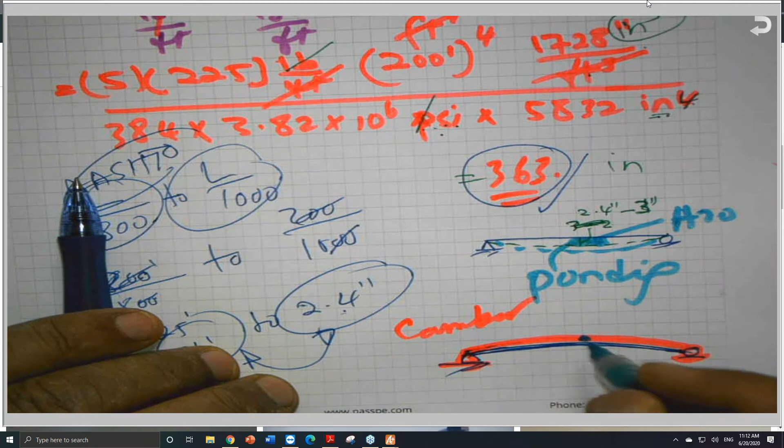Also, it's going to scare the people. Mr. Mansour, who will see a beam like this coming down, it's still safe. The 2.4 to 3 inches is still safe, but it's not really appealing to the eye when you see a bridge sagging down and you say, wait a second, don't go over this bridge. No, it will not come down.

But the biggest issue is the water issue, the hydroplaning, and the additional load. This is why we provide some kind of camber diagram or shape, to be effective in draining the system quickly and to avoid additional deflection, hydroplaning, and safety issues.

Okay, all these things are valuable discussion. I hope that you are agreeing with me. What else?

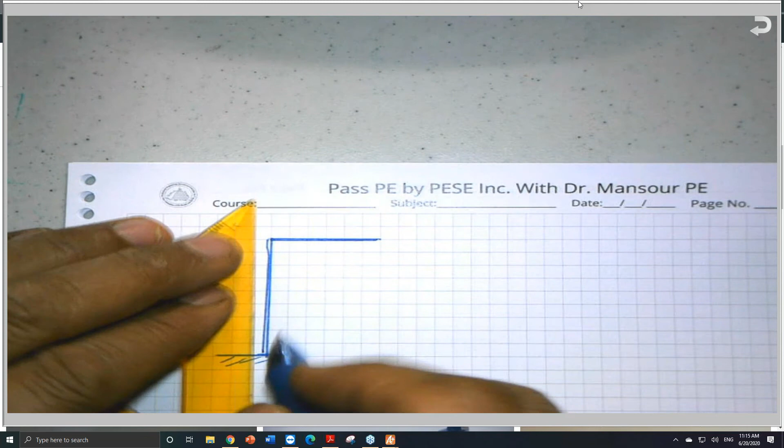Let me throw something here very quick. I was discussing something with somebody, and if you do have a frame like this - a frame structure consists of beams and columns. Here we have only one beam and one column. So I have a vertical member, which is a column, and the horizontal member is the beam. I'll call this A, this B, and this C.

Let's assume we have the following load. I have only one load acting at the free end, and the load is a concentrated load P equal to 4 kips, acting at point C.

This is 12 feet, and the height here is 28 feet, to make it to proportion. So the height of this column is 28 feet, and from here to here is 12 feet. So this is the frame.

Many questions could be asked related to this. You can ask: what is the maximum moment at B, and for answers... He can also ask: what is the maximum moment at A, most nearly, with answer choices.

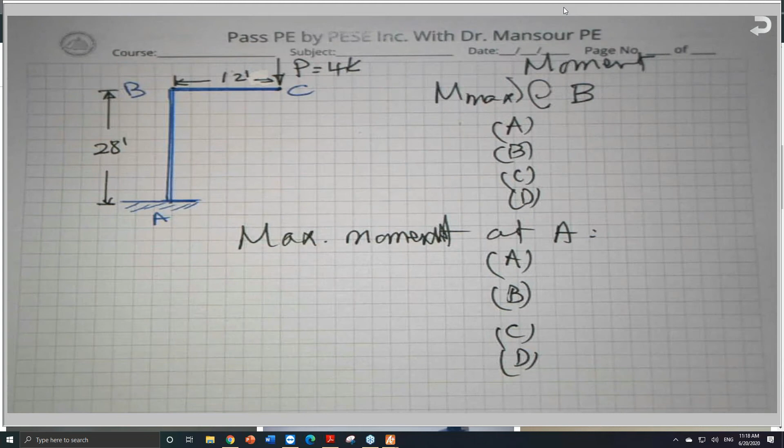Also, shear and moment diagrams could be part of this question. He can ask you to draw the shear diagram and the moment diagram - giving you 4 diagrams total. So four problems: problem number 1, problem number 2, problem number 3, and problem number 4.

What is the maximum moment at point B - B as in boy. Is it 4 kip feet, 24 kip feet, 48 kip feet, or 72 kip feet?

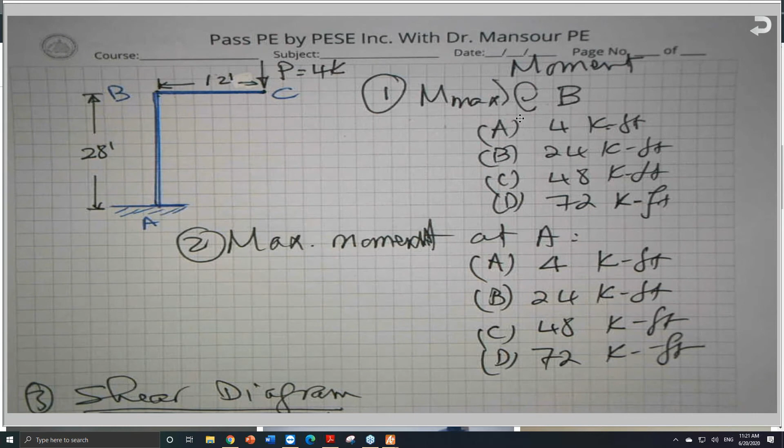What about question number 2, the maximum moment at A? The fixed end is here. So for the maximum moment at A, I also got some correct answers - it's still 48 kip feet.

Now I need you to draw the shear diagram for this frame - fixed here and free at the other end, frame as shown. I need you to draw the shear diagram and the moment diagram. I'll give you 2 minutes each, and I can give you 4 answers.

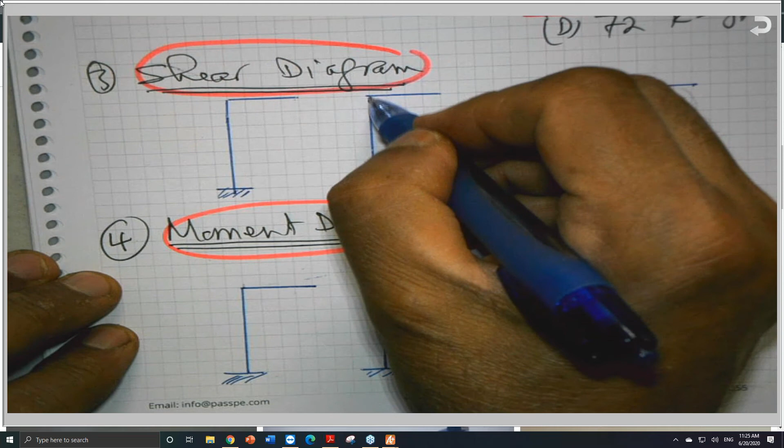Here we go, I drew the frames for you so you can sketch the shear diagram - normally labeled V - and the moment diagram - labeled M. This is A, this is B, and this is C. I can draw some diagrams for you, but let me give you a chance.

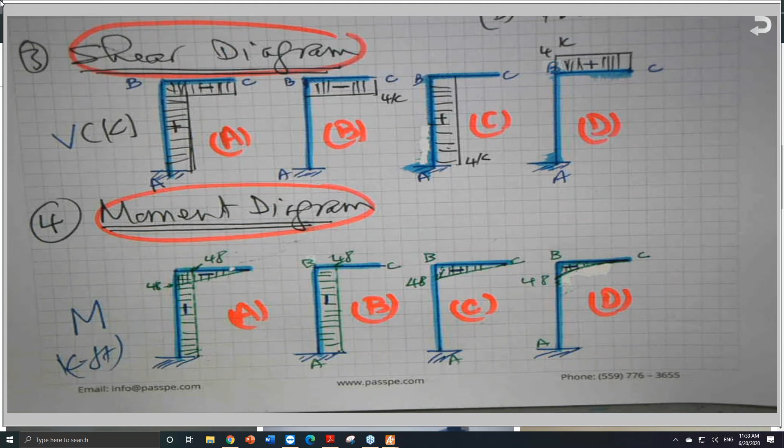Okay, so this is the original frame. When you receive the problem, I will scan it before I go to lunch today and send it to you, and get the PDF.

Look at it and tell me what you think, but let me draw the other problem very quick, at least so you can start working on it.

So it is a beam that, as shown, is fixed from one end, totally fixed, and it is simply supported here with a roller. But if we look at this beam, by the way, as is right now, this is statically indeterminate to the first degree.

So it does have a distributed load along one portion of it. It is 5 kips per linear foot. Probably my scale is not quite right. This is 4 feet, and at another 4 feet I need to move the other end.

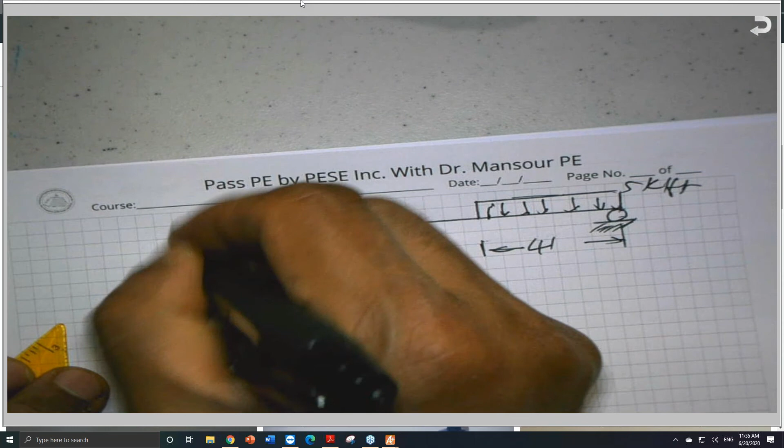This beam, by the way, as is right now, if this is A and this is B, it is statically indeterminate to the first degree. Why? Because I have 3 unknowns here and 1 unknown there, so 4 total: A sub y, A sub x, and the moment at A. So if I keep the beam like this, it is statically indeterminate to the first degree, because there are 4 unknowns and only 3 available equations.

So in this case, since I already wrote something here, let me make my dimensions a little smaller so it can fit. So this is 4 feet, the first 4 feet it does have. In order to make this beam statically determinate, we can introduce what is known as the internal hinge at point C, and the hinge is also 4 feet away.

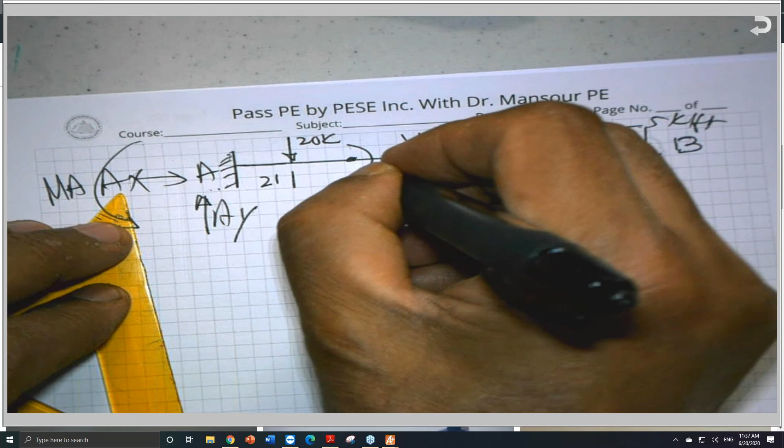And there is a concentrated load here, 20 kips, only 2 feet away. And there is another moment here, a concentrated moment, 50 kip-feet, and this moment is 2 feet away from either end. So this is what I needed to work on if we didn't finish it. So it is 2 feet and 2 feet and 2 feet.

And the beam, so I have a concentrated load of 20 kips. So this is A, B, C, and this is D, and this is E. So at D, there is a concentrated moment as shown, 50 kip-foot in this direction, clockwise, and a distributed load, 5 kips per linear foot.

Okay, and tons of questions could be asked. For example, what is the maximum moment M sub A, or what is the moment at A? Okay, or what is the moment at D? What is the moment at E? You can ask all these questions. Okay, so I need you to do all this.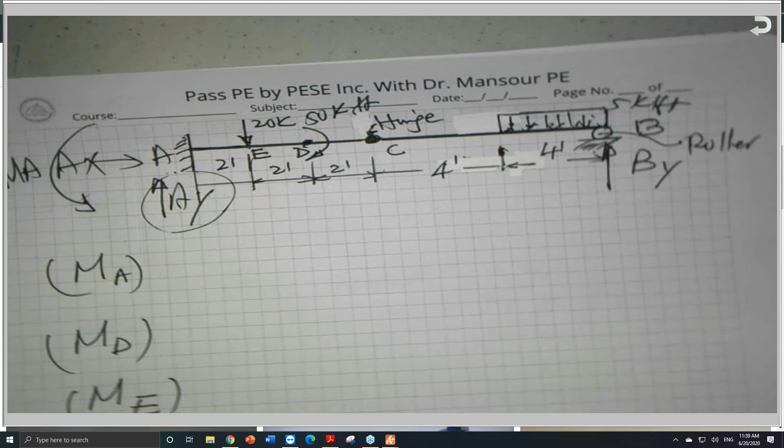Now, by giving this internal hinge, okay, this is an internal hinge, let me just remove this arrow here. So this is an internal hinge. So right now I have 3 unknowns still here, and 1 unknown here, which is B sub y. Why is this? Because this is a roller support, and a roller has only one reaction, perpendicular to the contact surface. So he might ask you what is A sub y, the vertical reaction, how much? He can ask you, obviously by inspection, A sub x is equal to 0, so the component in the x direction is equal to 0.

But he can ask you about the reaction here, B sub y, how much? So if we can get the moment at A, M sub A, and M sub D, it could be M sub E, many questions that could be asked.

Reaction, and also what I need from you to prepare is to draw the shear and moment diagrams for this, which is V and M for this beam. So if we can draw the... here we go.

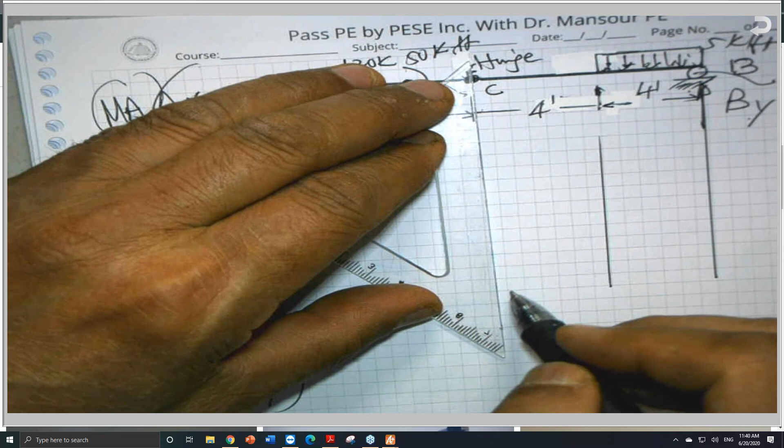Okay, so right now we need to draw the shear and moment diagrams for the given loading as indicated here. There are tons of problems in every single book available in the market on structural analysis. I enjoyed the structural analysis books I used way back in Las Cruces, New Mexico, and here at CSU Fresno, and there are tons of problems.

But if you understand the concept, this is V and this is M. V in this case I will put in kips, and the moment is in kip-feet. Remember the two equations that I wrote before: dM/dx equals V, the shear value is equal to the slope of the bending moment diagram. And the second equation, dV/dx, is equal to negative W.

If we are able to recognize these two equations and understand them, we will be able to solve it. Please go ahead and practice a lot of problems.

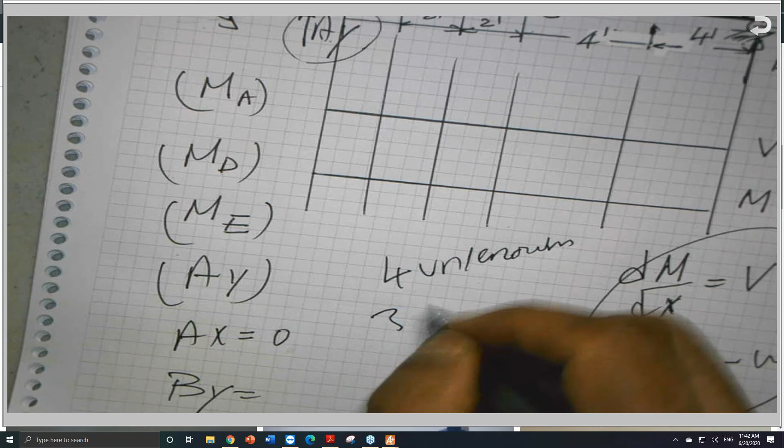But by putting this hinge here, the internal hinge, I have four unknowns: A sub x, A sub y, M sub A, and B sub y. So I have four unknowns, and I have only three equations, which is sigma force x, sigma force y, and sigma moment.

But I do have a conditional equation. This conditional equation is at the hinge. What do I have at the hinge? I have the moment equal to 0.

This is like the hinge in the door of your house. The hinge lets me open and close the door. Why am I able to open and close it? Because the moment is equal to 0, except for friction and air resistance. Forget the friction resistance of the hinge itself, especially if it's rusty, like a bathroom or shower door with a lot of rust. Then it's probably very difficult. But theoretically speaking, ignoring friction and air resistance, the moment has a value of 0 at the internal hinge.

So this is a hinge, so I know the moment. This is called a conditional equation. So I have a conditional equation here that the moment at the hinge is equal to 0. So four unknowns and three available equations, which is sigma force x, sigma force y, and sigma moment, plus the one conditional equation from the hinge.

In this case, we have 4 equals 4. So this is statically determinate. So this is a statically determinate beam.

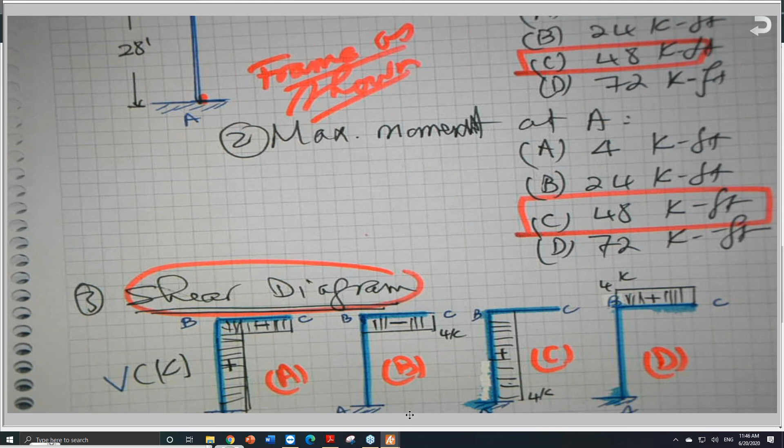Do your best, okay? So going back to the problem here. This one here concludes our discussion. So the shear diagram - is it A, B, C, or D? Which one is the best? Which one is the correct one?

And I try to put signs, positive, positive, negative, negative, positive. I try to do my best here. So I'm looking for problem number 3 for this given frame here. Which one is the correct shear diagram? V in kips.

Okay, based on your selection, let me go to the questions. Okay, I got only one answer so far. I got, okay, another answer. Okay. Any suggestions? Any other suggestions? Okay. A lot of answers, but...

If you look here, you'll find that the reaction at A sub y is equal to 4 kips, and A sub x is equal 0, and the moment at A, M at A, is equal to 48 Kip-feet, the one we agreed upon. So for the shear, this vertical column AB does have axial load only, which is compression, so it doesn't have any shear. It does have shear only if A sub x exists, but we don't have any components.

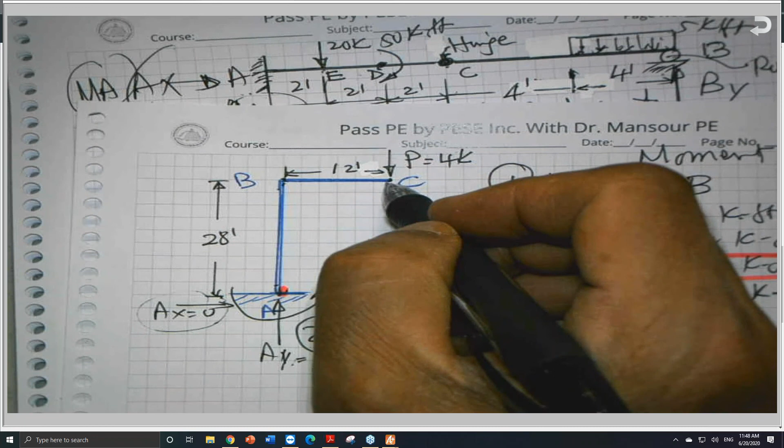So there is no shear here, and I will come here. I will go up 4 kips, which is this one here coming from here, 4 kips, and go straight until I hit C, 4 kips coming down. So the answer is D. Okay, so the shear diagram is D as in David. And when you receive it, look at it again and let me know if you disagree with me. Don't take me to court.

Okay, we agreed last time, I believe, or the time before, no court this time. So we're going to resolve our differences here without going to the court. And if I'm wrong, I'll say, oh, I was wrong. Okay. If you are wrong, you say, yeah, I was wrong. And this is our objective here, is to do our best, and nothing wrong if we made a mistake here.

Okay. What about the bending moment diagram? So we can conclude. So I can go and scan it right now. Okay. Bending moment diagram. Either A or B or C or D.

By the process of elimination, I don't know if you noticed this is a curve. I drew it like this, second degree, a curve. Obviously, I have a concentrated load. So the shear is 1 degree higher. So this is a straight line here, has zero slope. And as you can see here, by the way, dV by dx is equal negative W, this equation. The slope, what is the slope of this? It is 0, because there is no load from here to here between B and C.

Okay? So this is a concentrated load. So the degree of the shear is 1 higher, and the degree of the moment will be 1 higher. This is horizontal, so this is out. Parabolic only if the load is a distributed load, like this portion of the bending moment diagram that you are going to draw. This is a distributed load. You will find that the shear is linear and the moment is a second degree. You will find that after you draw it, okay?

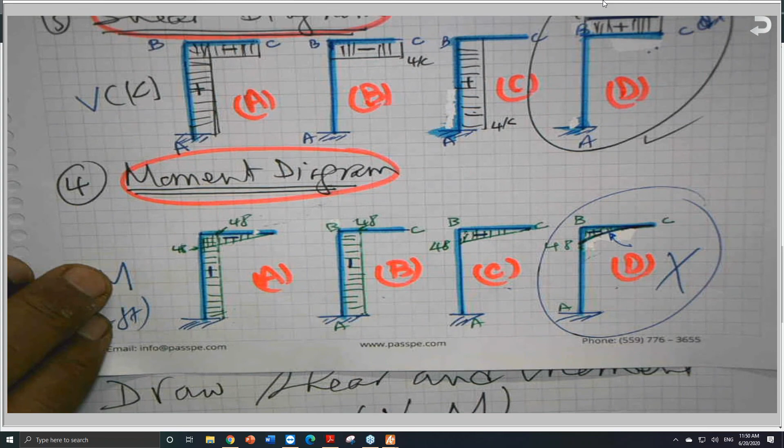So the process of elimination is also a powerful tool. I need you to be aware of that. So this answer is out because of this shape here. I gave you these two questions first so you can figure this out, by the way.

The moment at B is equal force times distance. It is 4 times 12 is 48. So the moment here is still the same. The moment here is still the same. The moment here is still the same. Until the moment here is still the same. Okay?

I still have 3 answers, either A, B, or C. By the process of elimination, the answer B is out. Why? Because it's showing no moment here along this portion of the frame. No, the moment at C exactly is 0, yes. But the moment here, 1 foot away from C, is 4 times 1 is 4. At 2 feet, 4 times 2 is 8, until the maximum here is 4 times 12 is 48. So the answer B is out.

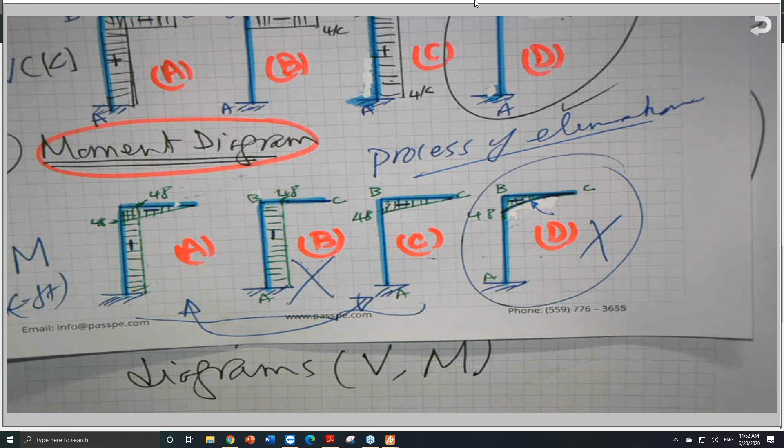Here he showed only the moment along the beam portion, the overhang, if you like to call it, the beam portion. But this vertical column also has a moment. It does have a moment. In fact, the deflected shape of this, by the way, is like this.

I'm just exaggerating the deflection. If you push this down, I'm just very, very exaggerating it, okay.

So this is compression, and this is tension. And this is tension, and this is compression. What kind of bending moment is that? Do you remember? The positive bending moment is the happy face: compression, tension. The other one is tension, compression. So this is a positive bending moment, and this is a negative bending moment.

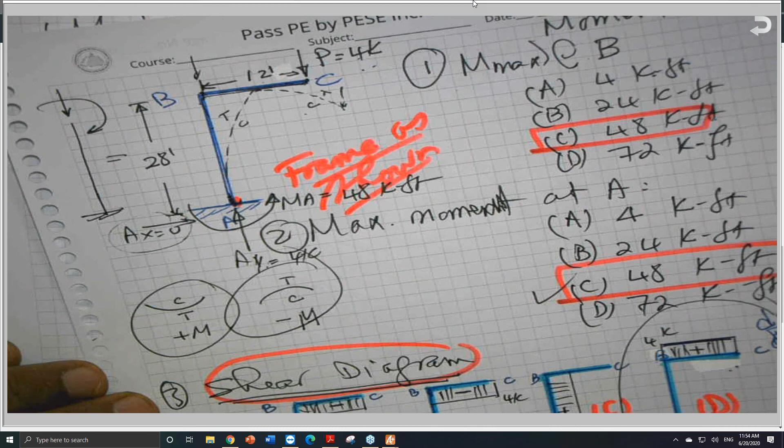In fact, if you like to look at it differently, you can say this is equivalent to what? To a vertical column. I can take this load, put 4 kips here and subtract 4 kips. I can say this is an axial load and bending moment. This is equivalent to this. So the bending moment here is constant, and this bending moment here is constant.

This is why answer C is the correct answer. This is 48, the maximum here, and 48. So the bending moment at this corner is the same along the cantilever and along the vertical column. So the answer C is the correct answer, okay?

If you disagree with this, please let me know, and I will go and scan this right now.

Thank you very much for coming today, and I hope everybody is studying hard and getting ready for the exam. The exam is coming. If you think they are going to postpone it again because of this corona stuff, no, I don't want you to assume that. I need you to assume the exam will be held on time, and you will go to the exam and ace it in one shot. And I hope this is going to be the last national exam you take, so you can forget it and move on.